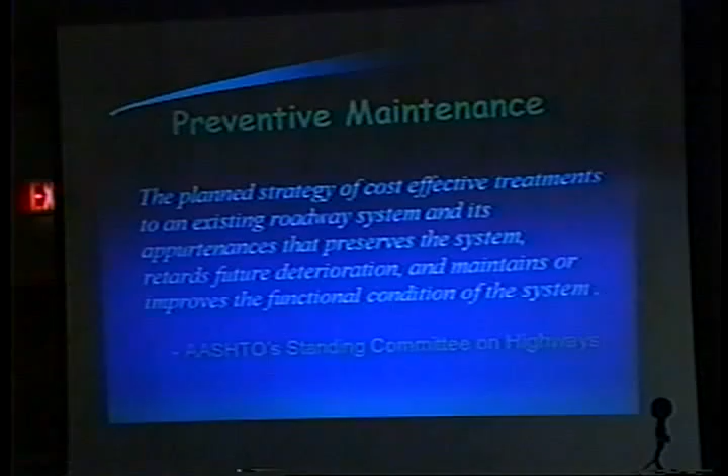Preventive maintenance is a big part of that, and I'm sure either Eric gave you the definitions of preventive maintenance, or we will give you some that have been approved through the National Task Force. The AASHTO Standing Committee on Highways, which works nationwide, defines preventive maintenance as the planned strategy of cost-effective treatments to an existing roadway system and its appurtenances that preserves the system, retards future deterioration, and maintains or improves the functional condition of the system.

The essence of that is, you guys were asking Eric questions about heavy loads and load-related distress. Preventive type treatments are not going to do anything to address that kind of problem. If you have heavy overloads, you have fatigue in your pavements, you need to do something other than these preventive treatments—you're either going to have to reconstruct them or rehabilitate them. We can't go into all the information here, but there's plenty we've got for you on the back table, and we'd be glad to share that with you at any time.

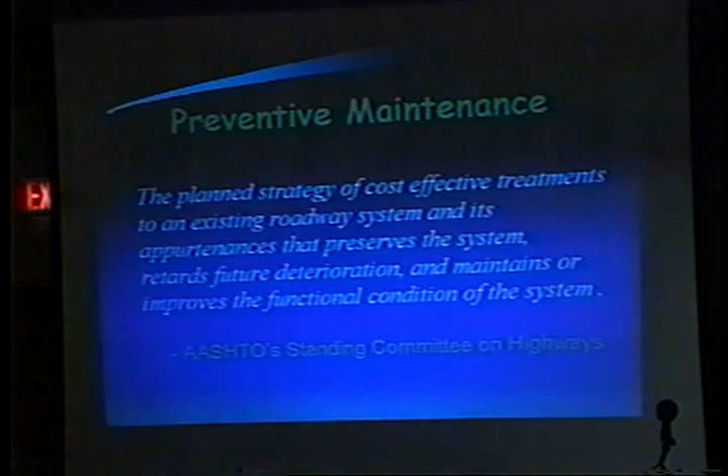Let's take just a quick look at the legislation to get us to where we are today. The Federal Aid Highway Program's been around a long time. Once upon a time, the whole purpose of the Bureau of Public Roads, the predecessor agency for federal highways, was to get the farmer out of the mud. Since then, legislation is reenacted every 4 to 6 years, depending on how long each highway bill lasts. But in reality, what we were trying to do, as one of the previous slides showed, was that our goal was to construct the system.

We wanted to get the system constructed, and philosophically, once we did that at the national level, the program would be turned over to the state and local agencies. Well, in the middle 70s or so, we started to realize we're not going to make it. We'd got the system about 50% complete, and we're starting to get fatigue-related distress deterioration. It's handling a lot more traffic. So at that point, the law was changed, and it allowed resurfacing, restoration, and reconstruction.

As time's gone on, we've changed the program to try to meet the needs, and that brings us up to where we are in the last 10 years. The first one I'd like to talk about is the 1991 Intermodal Surface Transportation Efficiency Act, or ISTEA.

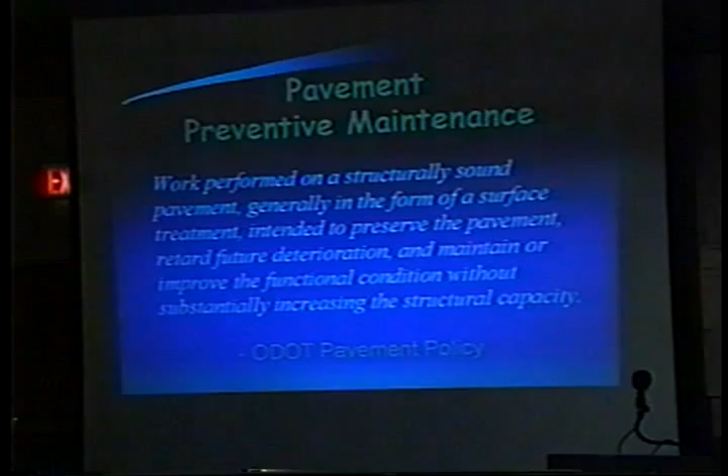Anybody ever heard anything like that? Does anyone know where that definition came from? Where's Eric? Is he in here? You knew where it came from, didn't you? You wrote that. Eric wrote that, okay? So that's in the ODOT pavement policy. Goes to show you not all of us could remember everything we ever did, and it's pretty tough.

Now, some of these definitions are pretty long and drawn out. So what are we trying to get at? Let's try to make this as simple as we can. The philosophy of pavement preventive maintenance: applying the right treatment to the right pavement at the right time. Now, that's the other extreme. That's really simple. We went from pretty complicated, trying to figure out the definition, to the philosophy here.

How do we do that? Well, that's going to take some study and some information. And we have the mechanisms now to collect that information, to store it in our computers, to process it, to use it. As time goes on, we want to build on it. But certainly there are some questions that are a little bit more difficult, and this is about where we are now.

We know the answers to some of these. A lot of these, we need all of you guys from your end to tell us back how some of these treatments are performing on your roads. If we don't all work together on this, we can't answer all these questions. None of us know the answer to all these things.

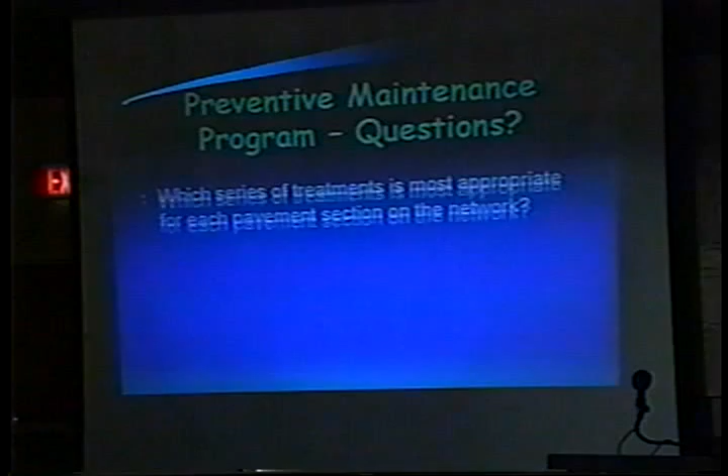Okay, first question: which series of treatments is most appropriate for each pavement section on the network? Does anybody feel like they have the answer for that? Let's take Interstate 70. We built it back in 1959, let's say, one section. It was a concrete pavement. What would have been the best way to get to where we are today?

So 59 to now, that's what, 42 years or so. How could we most cost effectively have used our funds between 1959, when we first built it, and today? Those are the kind of questions that we're after here. That's kind of a tough one there.

When is the optimal time to apply those treatments? Does anybody have any procedures or process to determine when you're going to fix your roads? Obviously, everybody has that. You're out there doing it. What do you base it on? Budget. Absolutely. Budget is driving a lot of the decision-making process.

What happens when you have a year with zero budget, let's say? What do you have to do? You got to defer it all, right? You don't have any budget, so we got to defer it. So the budget's critical. Now, we all have some budget. The question is, how are we going to use that to our best ability?

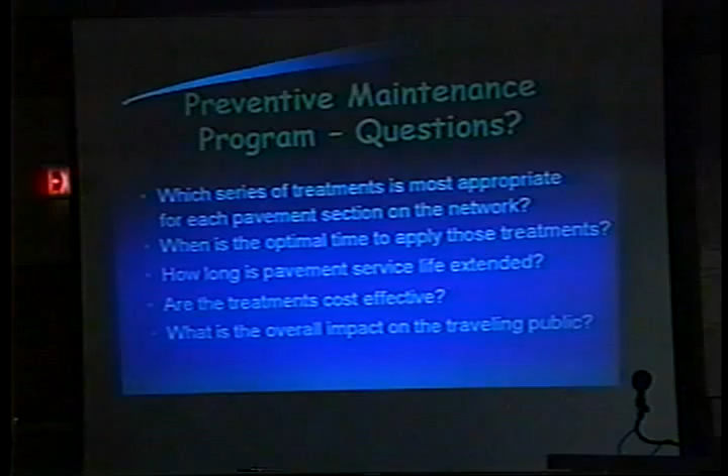What's the overall impact on the traveling public? Boy, we hear this one a lot. Every time I tell anybody that I've just met that I'm a highway engineer and I work in pavements, you know what their response is? Well, you're the guy that's putting all the orange barrels out there. So for this one, this is a biggie. What's the overall impact? Now, some of the benefits of preventive maintenance, we can address some of those things. And we'll get to that in just a minute.

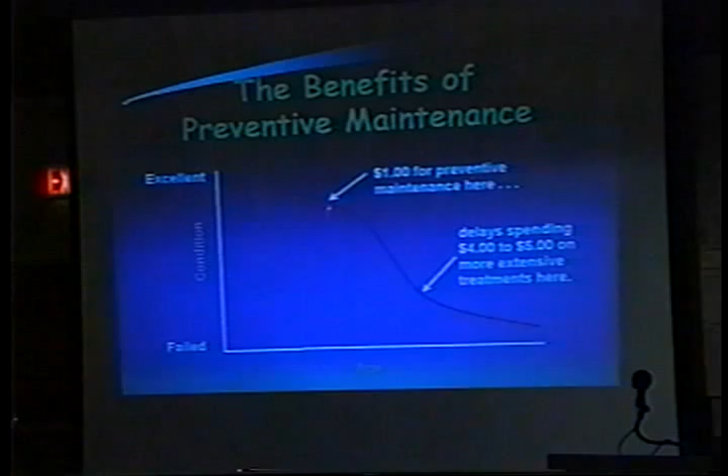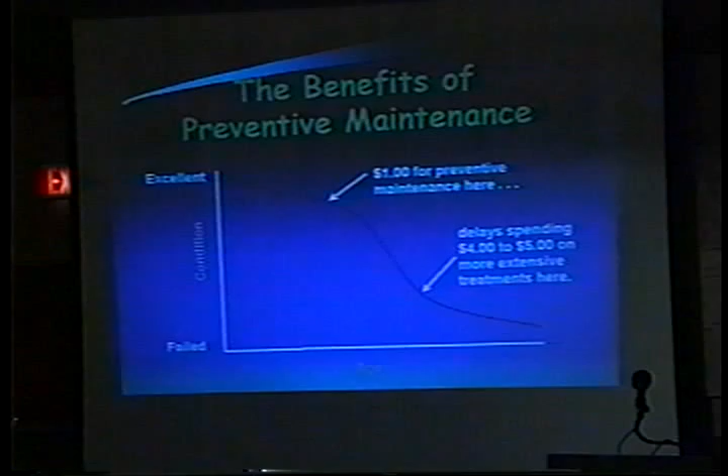So what's the solution to that? Well, what we've learned from our research and experience over the years is that if we come in here at some particular point in time and spend $1, that'll save us 4 or 5 dollars down here. Now look how much time basically has gone by. Maybe that's 70% of the life of the pavement. It's still in real good condition up here. So why are we just waiting this little bit of time to come down here, wait till it failed, where we got to reconstruct it? Let's see what we can do to get up in here and spend the $1 and save the $4 or $5 later. So that's what we're trying to do. That's one of the benefits.

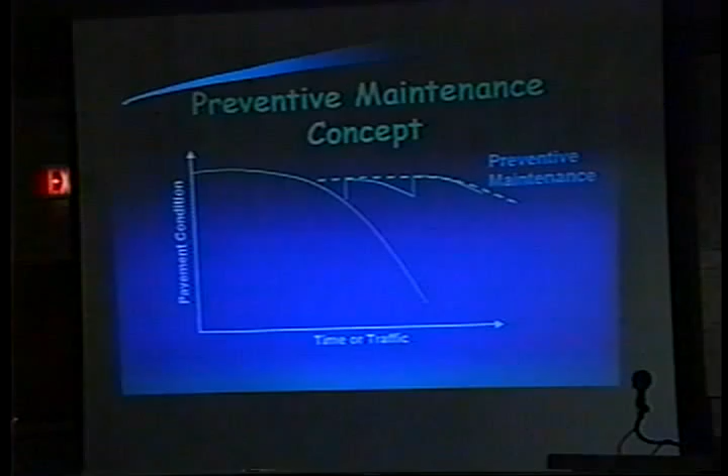Okay, so the importance of preventive maintenance is, first, our focus is no longer on new construction, but on preserving the existing system. Second, preventive maintenance plays an essential role in this preservation. Can we just do preventive maintenance? Well, heck no. Some of our pavements need to be reconstructed right now, or they need structural overlays. They're all in different condition.

We have concrete pavements. We have asphalt pavements. You might have oil-treated roads. You might have some dirt roads now, or just gravel roads, whatever your situation is. You've got concrete pavements that have been overlaid with asphalt, pavements that have been overlaid with asphalt or concrete, and on and on and on. So we have to figure out what's the best way to do all this. But the bottom line is, number 3, we can't afford to keep doing things the same way that we have in the past. We really need to make some changes to make better use of our limited budgets.

Okay, so now when's the best time to do these treatments? You guys have any idea? We just kind of talked about that point on the curve. Somewhere out here, where's this magic point? What is it in your agencies? Like if you're doing a chip seal, how do you determine when you do a chip seal? What condition is the pavement in?

Anybody have any? Were you just scratching or stretching?

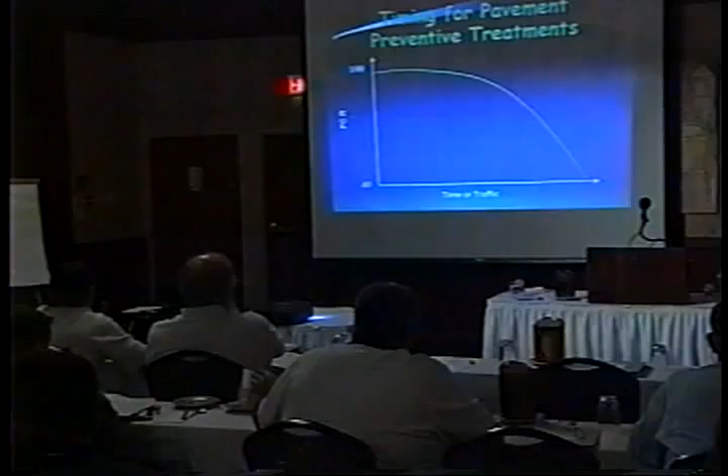Well, we usually go out and every mile of the roads, and patch, crack seal, and patch potholes and major cracks. I work with Dean here, we work together, and if we make the determination that there's so many cracks, and it's getting to the point where we're not moving through very fast, and I know that's not real scientific, but it works. If it's to the point where you've just got crack after crack after crack, it's obviously time you've got a surface treat, well, we call it the chip seal. And that's probably our most used method of preventive maintenance.

And you said a lot of good things there. I hope everybody heard that. Which agency are you with? We're with Bloom and Perry Township in Wood County. Okay. Anybody else with any of the townships or counties?

Well, it really doesn't matter, because no matter who you are or what you're doing or who your agency is, it's going to be different for all of you. You all have different budgets. You all have different roads. They were built with different materials at different times on different soils. So we all have to do what's best. If that experience is showing you that's the best way to go, that's the best way to go. That's what you know, and that's your program right now.

If the road has too many potholes and too many cracks in it, why go out there and crack seal it? We've got to do something more major, like a rehabilitation. Come in and fill the potholes and do a structural overlay, let's say. But we have to figure out what the cause of the problem is.

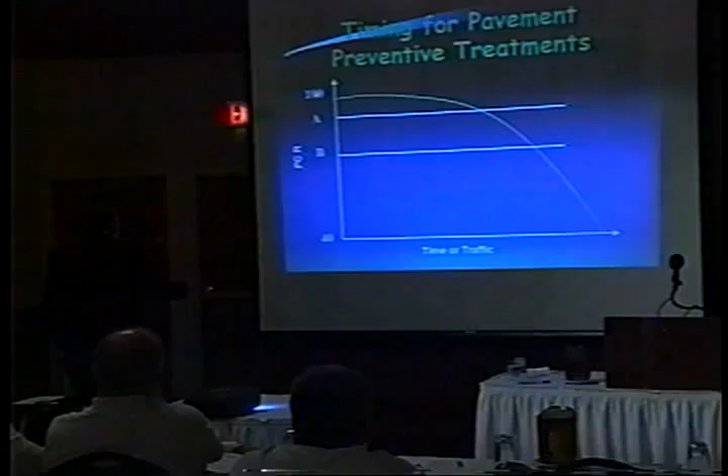Okay, so let's try to take our philosophy here now and say, well, we don't know where the heck the perfect time is to do these pavements. They're all different. So why don't we say that point that we saw before, A, we know it's somewhere out here. We don't know exactly where. So let's just say it's between A and B. And maybe you call this 100 up here excellent and this poor or failed or whatever. You all have different measures for what you're doing.

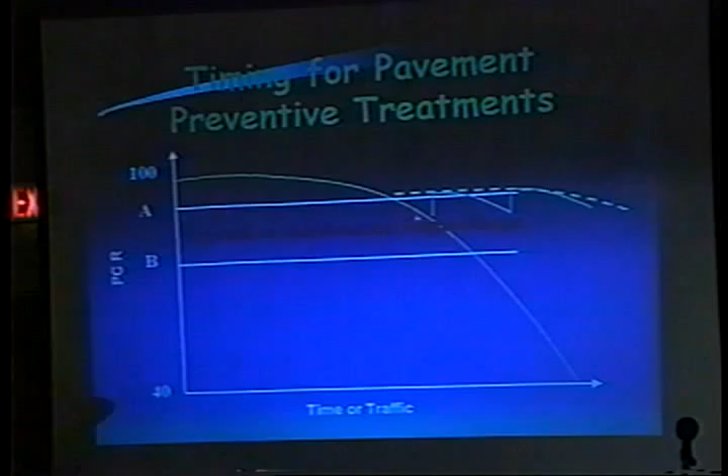So we established a target range to come in and try to start doing these preventive maintenance treatments to keep our condition up at a higher level of serviceability. And like we saw before, that changes this yellow curve to a combination of the yellow and the dashed white out here. We don't know exactly where it is, but if I was driving on a road, I'd sure rather drive on that than have to deal with this. It'd be nice if we could stay up here and keep our roads in good condition. So that's what we're trying to do. Okay, so those are the preventive maintenance treatments.

Again, what we did with ODOT, we worked together on something. ODOT has a very formalized process. They go out, do a distress survey on their pavements every year, and they've been doing this since 1985. So they have 16, maybe 17 years of data. About once a year, they know what condition each one of those sections of pavements was in. Of course, they've got 19,000 miles of pavements to maintain, so how do you keep track of all this stuff? Well, somehow we've got to break them down and analyze each individual pavement.

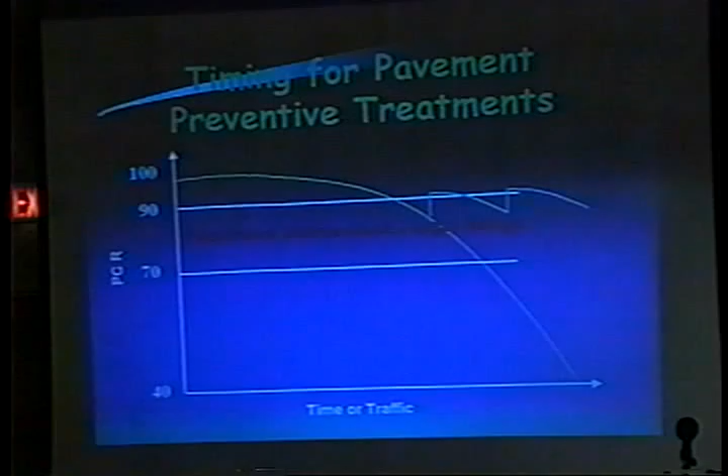So where ODOT says a 40 PCR approximately, that's poor, failed, whatever you want to call it. Somewhere near 100 up there is when we originally built it. Well, we said, we don't know what this preventive range is. It's different for every pavement. So why don't we just say somewhere between 70 and 90? Instead of waiting until it got to 40 and spending the big bucks, let's see if we can do something up in here. We're trying to hit those treatments in this target range, and put the preventive treatments in there. All right, what's the key here to do all this?

Most people are not going to have 16, 17 years of data and the analysis capability that state highway agencies have. And in the state highway agencies around the country, there's 50 of them. They all have a different process and procedure. They're all at a different point. And it really doesn't matter. It's going to be what works for you. How much manpower do you have, if you have any left at all anymore? Are you going to contract these things out, or how are you going to address this thing?

Well, let's again step back and try to make this really simple. What do we need to do? At the state level, California did a study, after they had data like ODOT did, and they said, our goal is to reduce pavements in need of rehabilitation from 29% to 11% in 10 years. Okay? So they're trying to get all those problem pavements that need rehabilitation and reduce that number to 11%. They can't get rid of all of them. You never can, really. It's a very difficult thing to do unless you've got an unlimited budget and you just go out and rebuild it every couple years. Certainly nobody can do that.

Wisconsin said, well, what we want to do is provide the highest quality service possible per unit of service with the budget that we've got. Well, that's kind of like mom and apple pie. We'd all like to do that. That's pretty simple and effective. Then we have the guys up north there. And what they said was, let's keep good roads good. Try to keep them in good condition. This is what we're going to try to do. They started a big program for preventive maintenance in 1991.

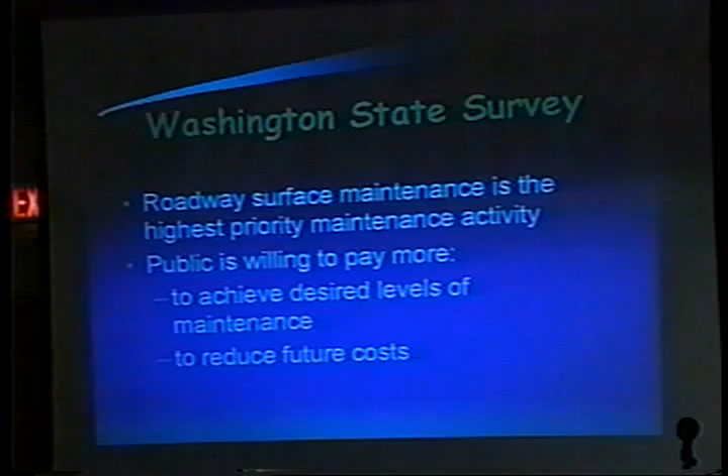How about in Ohio? When ODOT did a survey and they said, all right, people of Ohio, what's the most important thing to you when you go out and drive on our roads? What do you want us to do for you? What do you think? Sorry? Snow and ice removal. Snow and ice removal. That's a good one. That's important. That's a biggie. Anybody else? How about litter pickup? Pothole patching, bridges, signs, guardrails. What rates up there? Pavements. How about safety, overall safety?

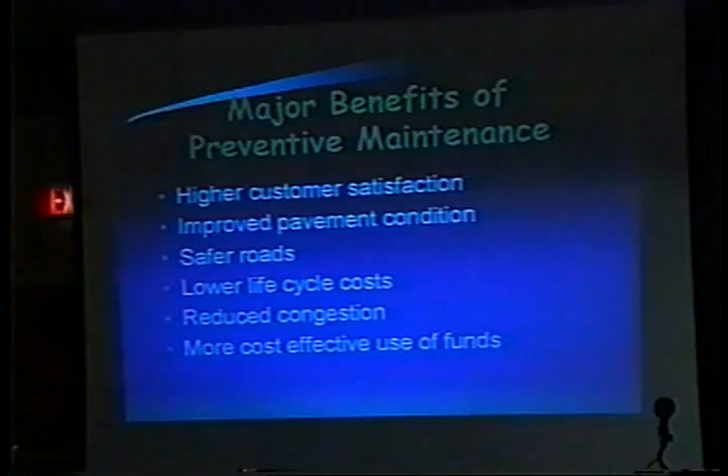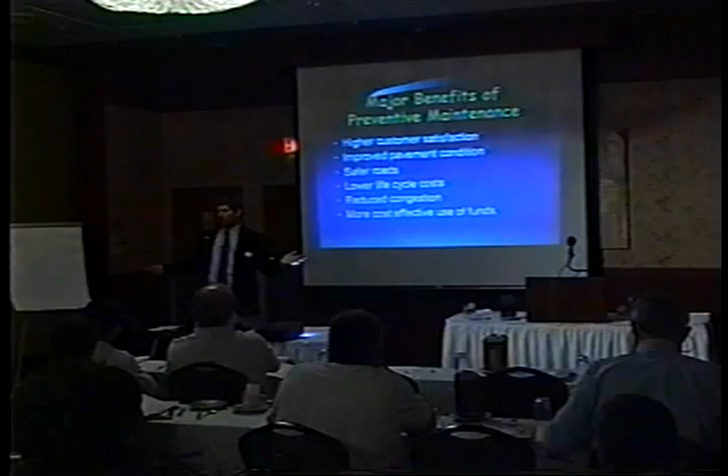The stuff that the contractors just love: night work. We say, all right, Mr. Contractor, you're not coming out here all day and working whenever you want. You can only use this section of the facility from 10 p.m. to 5 a.m. And then you got to get out because we got traffic that we're trying to get through there. And remember, the public doesn't want to be delayed. From 10 p.m. to 5 a.m., it's okay because we don't have hardly any traffic out there. They can get by using that one lane while the contractor takes the other part to work on.

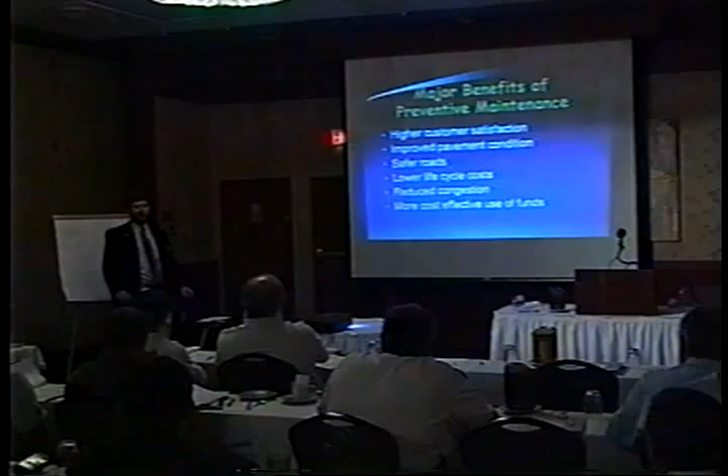All right, and the bottom line again, more cost-effective use of the funds. That's what we're trying to get to. Higher level of service, less expenditure.

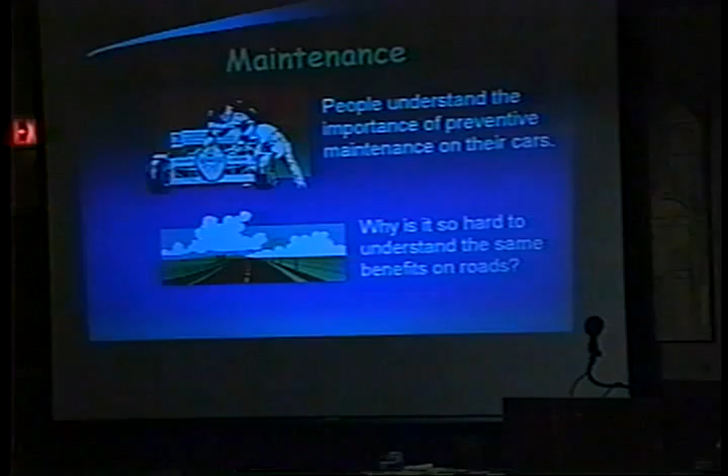This one's kind of self-explanatory. We all maintain our cars and our homes. Why not the roads? What are the keys?

Obtain top management support. If the boss doesn't buy in, if you guys go back and say, well, that sounds good, but we're not going to do it, what's going to happen? You're not going to do it. So we got to get the decision makers to understand.

Identify a champion. Maybe you guys will be the champion of your program when you go back, but somebody has to push this stuff or it never gets done. Develop guidelines. Eric gave you a copy of the guidelines that ODOT wrote.

Monitor condition over time. You may or may not be able to do that. Document the benefits to say, hey, we think we're doing better. We think we're using the money better. And refine our treatments after we gain experience.

Maybe we were chip sealing every 5 years, and we're learning that, well, this pavement we can chip seal every 7 years because it'll still be in good service. But this one over here, we have to chip seal it every 3 years. So it depends on the pavement in that individual section.

Okay, in summary, got to get away from worst first. Preventive maintenance can extend pavement life and reduce costs.

What are the keys to success? We think you got to have some kind of goal. You got to say, we want to keep our network at this level of service. Because if you're way down there, the public's going to complain. If you're way up there, it's going to cost you way too much money. So at what level do you want to maintain your network?

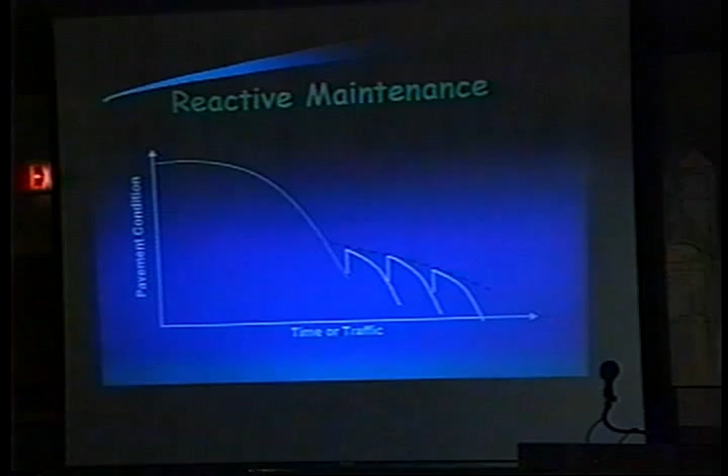I'm getting a signal that I'm way too long-winded. I was going to take some questions, but we'll have a panel tomorrow afternoon, so if you have any questions I'll be back for the panel and glad to address them then. Thank you very much.

Thank you, Bob. I just have to comment that the budget problem is not new. Fifty years ago, when I was in college, my civil engineering department head said every decision you make when you get out in the real world will be based on economics. I was 20 years old and didn't have any idea what he was talking about, but I sure do today, and it has to do with our personal life and your job life. So you were right on target with that.

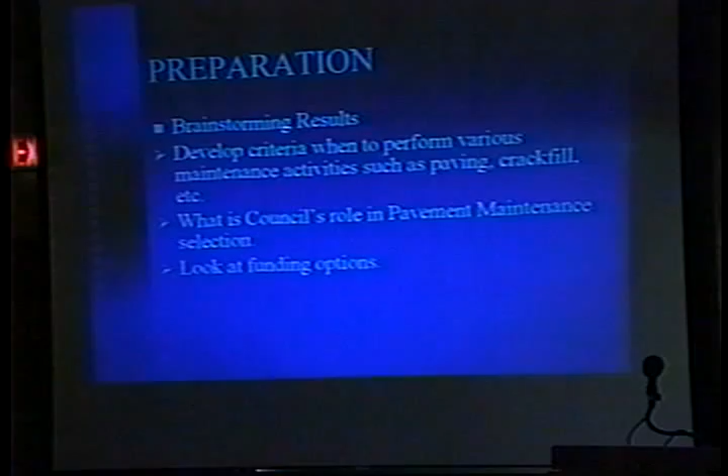Got to look at the funding options. We're taking a real close look at eliminating the assessments because of the headaches that causes us. We're looking at the possibility of a millage on property taxes so that everybody pays a little bit, dedicated towards pavement restoration. If we do some type of new funding source like that, the group realizes we have to legislatively tie that money to pavement maintenance, or some community center somewhere that one of the politicians wants, that they don't have quite enough money for, well, let's take it out of the pavement maintenance. So we've got to lock that money up. We're working on that.

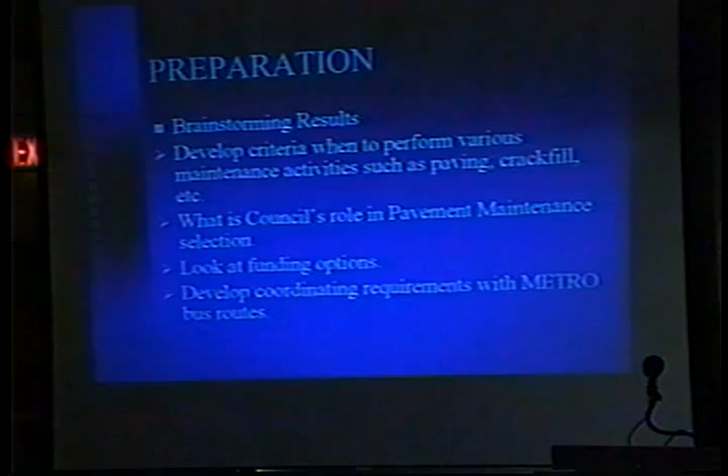We have Metro, which is our bus company. We've recently had some routes that Metro switched onto some of our residential streets, and within 3 months those streets saw 15 inches of rutting. I physically couldn't drive my city car across it, because it was never designed for those types of loads. So we have to coordinate with them better. This all comes down to: it became very evident very early on in the process that we needed a computerized pavement management system, and if we didn't have it, we were not going to be successful in anything that we were doing.

We looked at a lot of different ones. We decided on MicroPaver. I mean, there's a lot of programs out there. I used to write the software, so I helped develop new stuff. If you've got somebody that's knocking at your door saying, I've got the newest program for you, and it does everything, man, turn around and run. Kick him out of your office as quickly as you can.

I've seen too many programs go in that were brand new on the market, no one's ever used before, but this is the greatest thing since sliced bread. If it ain't easy, it ain't going to work. And if you're not dedicated to it, whatever that system is, it's not going to work either.

Funding. We had our task force chairman go to city council, and we had a request in for $260,000 for a consultant. We actually bought this program probably a year ago. The program's only $800 bucks. I mean, that's the easy thing. The hard thing's getting the data to go in it. And so we thought, we'll buy the program, $800 bucks, and then we'll fit in the inspection of the streets and the input of the data in our spare time.

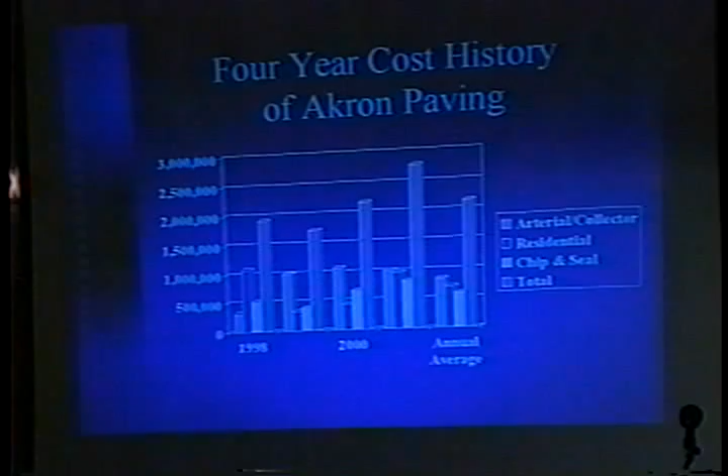So if you're thinking about how much budget the City of Akron's spending out of city tax dollars, cut those all in half. And chip and seal assesses at a higher rate. It's about 75% of the cost of doing the work we charge for. So as you can see, from year to year, about 1.8 million in 98, 1999, 1.7 million roughly, 2000, 2.2 million.

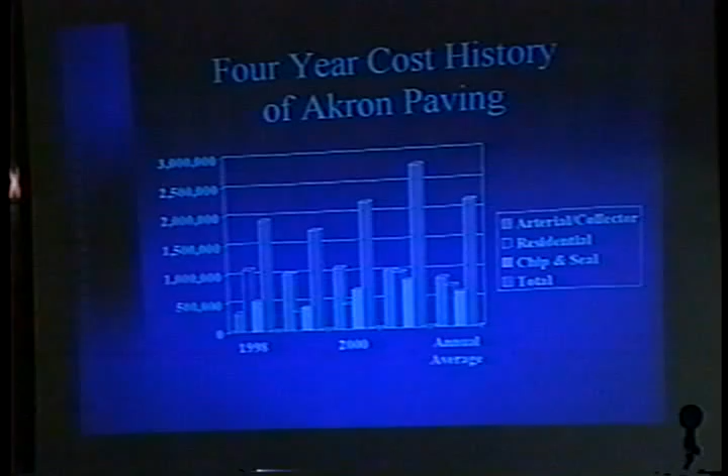2001, this year, they knew that we're working on this report. They knew this task force is coming. So they knew that we're going to be coming in and saying, we need $4, $5, $6 million a year to try to catch up for the next 5 to 6 years, and then we can drop down a little bit from there to maintain, because we're going to be in this catch-up period. So because of that, they found an extra $1 million to put into the program. So that gives you an idea of what Akron has done over the last 4 years.

If we're in a low budget year, historically what we've done when we've sat down and said, okay, what are we going to do this year? Well, we don't have much money. Let's do a lot more chip and seal. We can still get our mileage. Our assessment rate's so high that we get the most bang for our buck.

So the way that we're picking the streets that we're going to do is how much money we have to dedicate to each program. They give us a lump sum of money and we can spend it any way we want to within the arterial collector, the residential, and the chip and seal. Which, that is the wrong way to pick your pavement that you're going to fix.

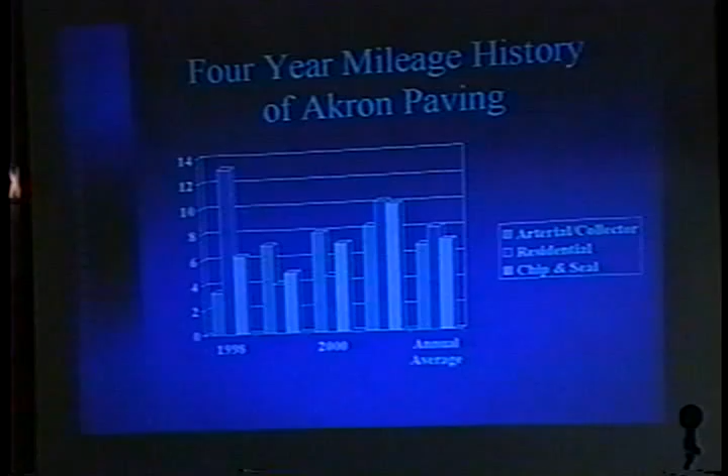Now, this is a startling one to me. What I did on this is I said, okay, let's figure out what percentage of our arterial collectors we paved in 1998. So in 1998, we paved about 1.4% of our arterial collectors. If you look at the annual averages, over the last 4 years on arterial collectors, we've averaged 2.8% of our arterial collectors paved each year. 2.3% roughly on residential, and 3.8% on chip and seal. And that's because chip and seal assesses higher.

Now, some of these are skewed a little bit, but arterial collectors, Akron, we have 230 miles of arterial collectors. With the percentages we showed on the last slide, that means that we'll pave once every 34 years on an arterial collector. How many people's pavements last 34 years? Now, granted, these numbers are skewed because this doesn't take into consideration monies that we get with ISTEA funds, issue 2. I would have liked to have rolled everything in and given you a better presentation, so these are a little bit high. But they're not that far off.

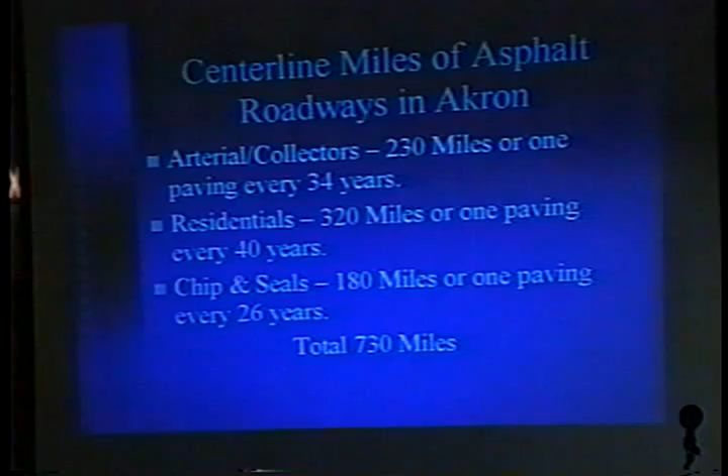Now these are strictly asphalt roadways. So we have about 730 miles of asphalt roadways. We have another 160, 170. We don't really know how many miles of roadway we have. We think we're in the ballpark. The consultant, after doing their inspection and putting this all on a computer, will be able to tell us exactly how much we have. So right now we're just kind of guessing. But the remainder of the streets, the roughly 150, 160 additional miles, are concrete and brick. We still have a lot of brick streets in Akron that have their own unique problems.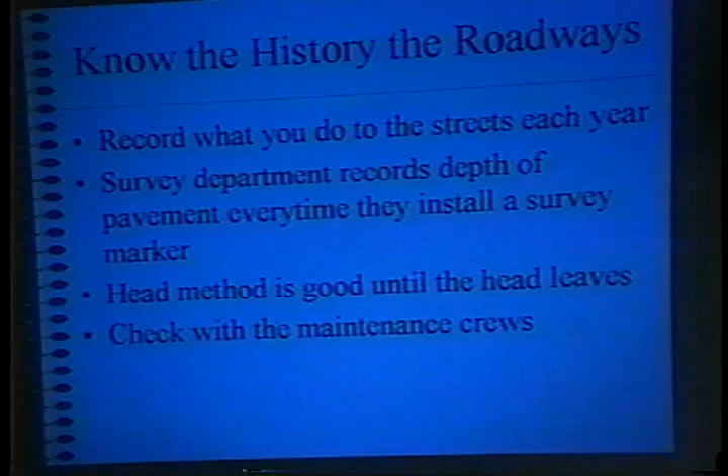Doug, he was a predecessor to Doug, and it's a very, very tough job. But Rel retired. Well, unfortunately, he took his head with him. So if you have that method, try to get it out of the head before the head leaves. Get it on something, get it on a computer, get it on a pad of paper, do anything but get it down. Check with maintenance crews, that's always a good source too.

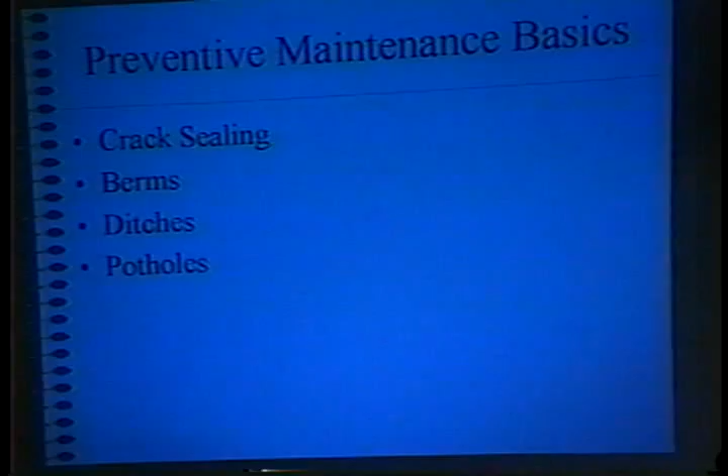I just want to go through the real basics. You guys went through some of the higher stuff. I just want to go through some real basic stuff that we do and how we do it and what the results are. Crack sealing, heard everyone talk about it. My guys, when I first got there, loved pouring the AC in the crack, spreading some sand on it. Who does that? You guys still do that, right? My guys love doing that. I stopped them from doing it 7 years ago. I'll show you why in a few minutes.

We have AC with rubber. I think it's okay. We haven't had real good results with it. Tom Nutini is with me. Tom is my highway maintenance engineer, but he's also in the same capacity with the city. Quick story with that is we have a contractor who was doing minor widening work, and he had a pavement joint, and we always told him to seal up the joint. And he'd use the AC and sand, but the joint comes back just like that.

The AC disappears. So we got blocks of AC and rubber, and you put it in the kettle, melt it. He told me to go out and look at it, said it looked pretty good. So I went out and looked at it. When I went out and looked at it, it was laying in the ditch. He said, oh, I forgot to clean the pavement and blow it out. I'm going to do another one. And he did another one. He said, come out and look at this one. Tom told him, why don't you just peel it up and bring it in the office. We'll look at it in here.

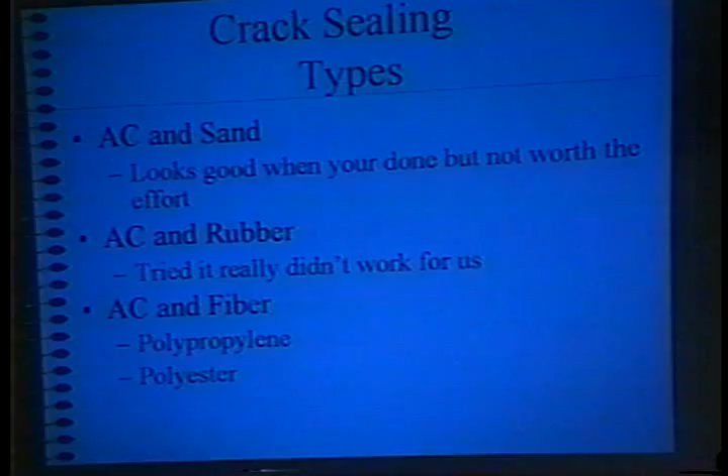In terms of crack sealing, I'll go through the real quick things. Tom, you can jump in if you want. When we did start off in crack sealing, we did it in a pretty big way. Like I said, you do it as soon as it's needed. Someone says, what's DA? That's duh. We started on several programs. I was with the city when we initiated some of these, and I remember the first ones we decided to start doing entire subdivisions. Rather than just doing streets, we decided to do whole areas.

One of the mistakes we made was we started on subdivisions that were pretty old. As a result, we put down a lot of crack sealing. Right, Tom? A lot of crack sealing. Also, we put them on streets. We didn't pay attention. They didn't have curb and gutter, and there were no sidewalks on some of these streets. People used the streets for where they walked. Man, did we get complaints. We crack sealed it. Must have been the hottest summer in the entire history of Ohio. It was in the 90s for days, and people were complaining about it tracking all over the place. We also crack sealed the gutter.

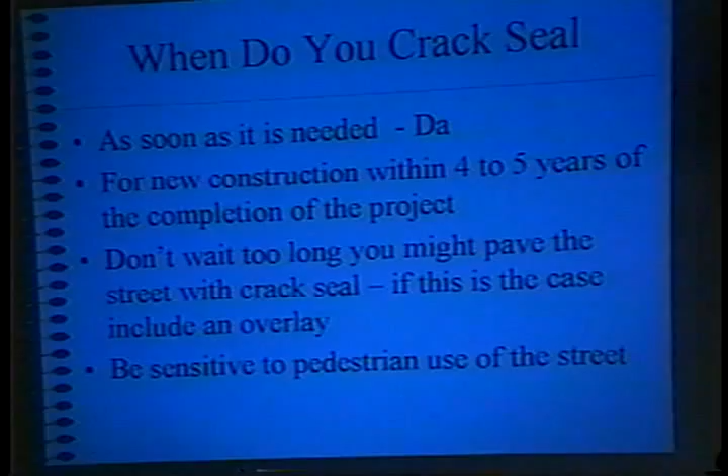Yeah, don't seal the edge of the gutters. We found that out. At least it didn't work for us. Especially if you don't have parking on the street, you're okay, but the cars parked on it and it pulled it right up. Make sure the cracks are blown out. Need some quality control check on the amount of fiber, just to keep everybody in line. Just don't assume what they're putting in is what you're supposed to be putting in. So check it. Doesn't cost that much to check it.

I might get a little controversy here, but I do like square yards. A lot of people, we used to pay crack sealing by the foot or by the pound. Square yards, you're saying, how in the hell can you pay by square yards? We pay by square yard of the pavement. So we figure up the total square yard of pavement. That's our unit of measure of pavement. Contractor has to go out and look at the streets. He has to estimate how much crack sealing goes down.

Versus you having to estimate how many pounds you're going to put down, how many feet you're going to put down. Every one I've estimated way low. So we go on to square yards. One of the nice things about square yards, well, it's easier to calculate. Two, I think they end up putting it down thinner because the less they put down, they get the same unit price. It's not going to change on them. Put it down per pound, the more they put down, the more they get paid.

So, and like I said, you can do your own crack sealing on a very limited basis. I would not encourage doing it on a large scale, but we got a small kettle for doing those small spot repairs or joints here and there where for the contractor it's not worth their effort. It's not going to come out. Do a small widening or whatever, but it's worked out pretty well.

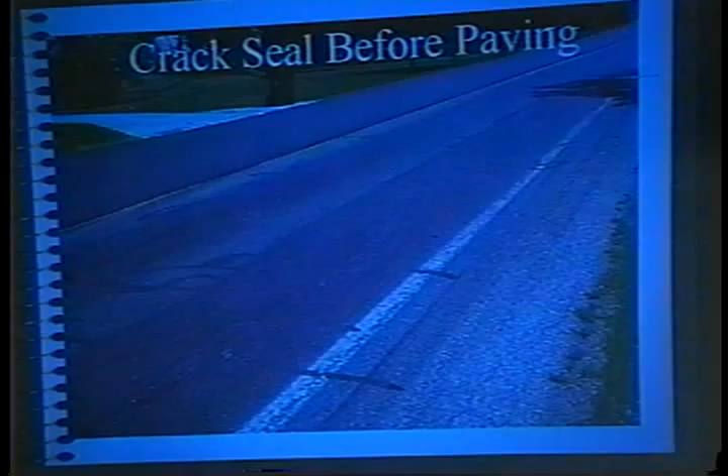Typically before an overlay, crack sealing we've done. If you have a street that has a lot of cracks, I just hold off, try to get it scheduled for some kind of either pavement or slurry seal or microsurfacing or something, because you get that much down, if it's on an area where they got to walk, you're going to hear about it. Typically, we go down to pretty small cracks. I think the standard was 1/4 of an inch, right, Bruce? We went down to 1/8 of an inch.

Berms. We're pretty religious on berms. When I was with the city, we weren't so religious. Going to the county, it's a whole different ball game. One of the things we do with berms is keep water away and give support for the side of the road.

We're real big into trying to get them graded out. We have a program every year. Crews go out and do berm work, chip sealing. If they're high, we grade them out. One of the biggest things that causes damage to our berms is our plows. But we're very, very big on the berm in terms of preventive maintenance.

Like I said, we have a good annual program. We chip seal. I recommend chip sealing over paving.

A lot of people will recommend just resurfacing the street. Say, hey, I can just widen out the paver, put an inch of asphalt on that, cover up that berm, save you money, be cheaper than chip sealing it. Yeah, it is cheaper. The problem I don't like about it is you lose the edge of the road. Now you have asphalt out there that's only 1.5 inches, 1.25 inches thick. You'll see it start to crack up after 3 or 4 years.

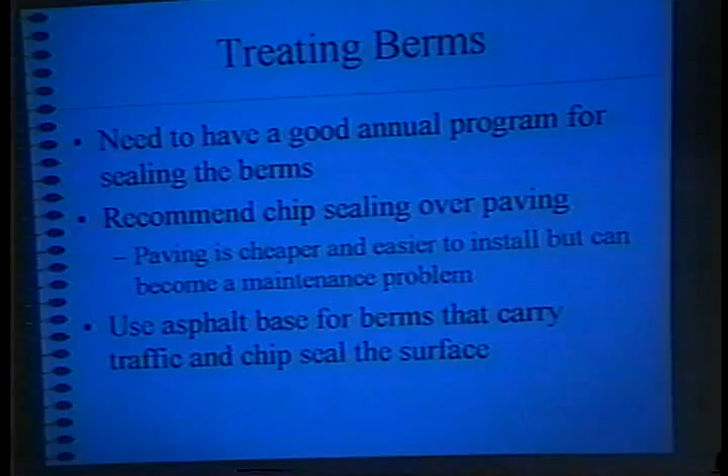We had situations where we put in like 6 or 7 inches of 301 and chip sealed the surface. Looks like a berm. Well, then at least when they drive over it, it lasts a little bit longer.

Basically, our operation is our crews. How many miles do we do a year? You have any idea, Tom? Between 150 and 175 miles of berms we do every year.

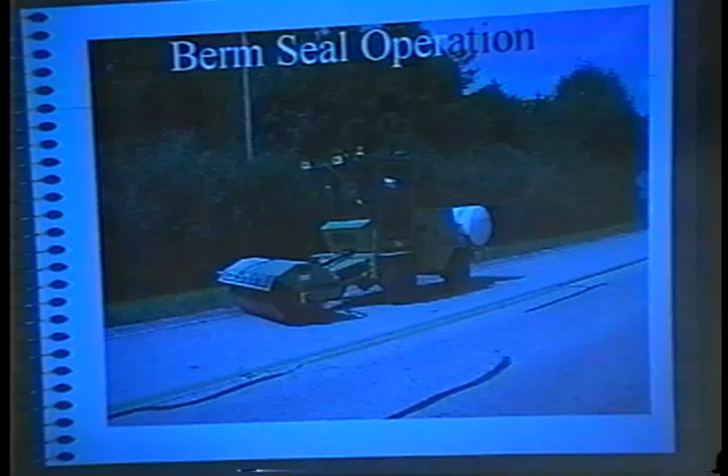Just a distributor, stone box, rubber tire roller, and clean it off. Pretty simple operation. We have 4 headquarters, and we pull guys from each headquarters to create a specialty crew, and that's what they do for about 2 months, 3 months, 2 months.

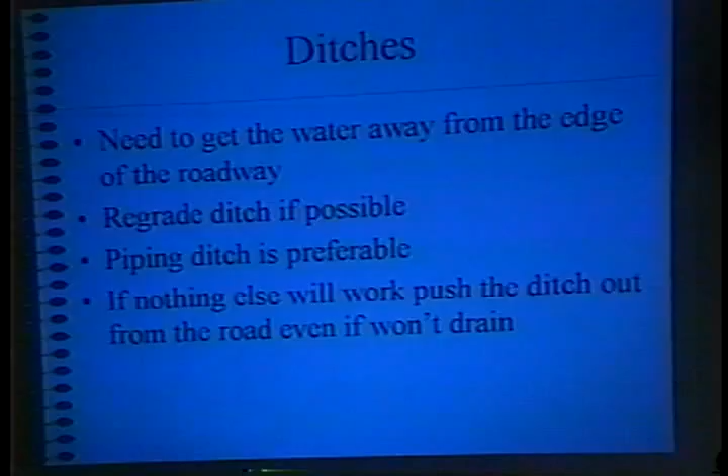Ditches: need to get the water away from the edge of the road. Water causes you more trouble than anything. It makes the side of the road soft, you lose that side support, and the road will start to push out. Regrade the ditch if possible. Piping the ditch is preferable. If nothing else worked, when we've done this, just push the ditch out away from the road. Even if it doesn't drain, if it's going to pond up, I'd rather have it be a little bit further out from the road than right next to it. In terms of enclosing roads and piping ditches, we probably do about 4 or 5 miles a year, basically with our own crews, and that's worked out pretty well.

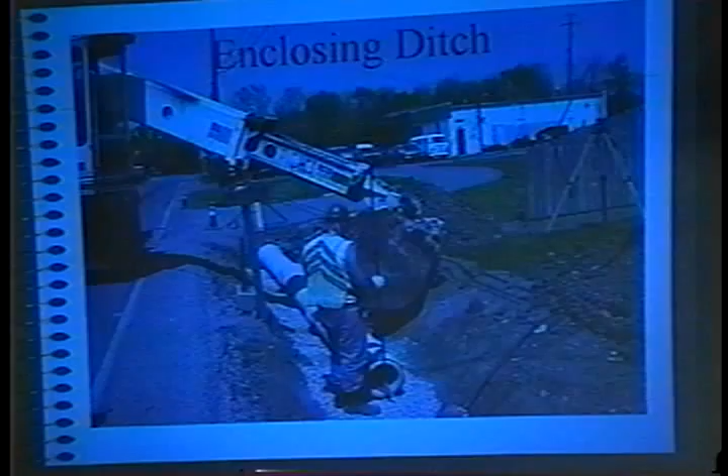We had one road, Bruce was working for the county then. When you hear from Bruce later, we did a design, what was it, $2.5 million to rebuild the road, Bruce? And we did a recycling with the company he's now involved with, kind of. Same problem, we had ditches that didn't drain, it's flat. What we did was push the ditch further out. It still doesn't drain, still flat, but at least it's not up against the edge of the road. It's a simple solution, it works, gets the water away from the edge of the road.

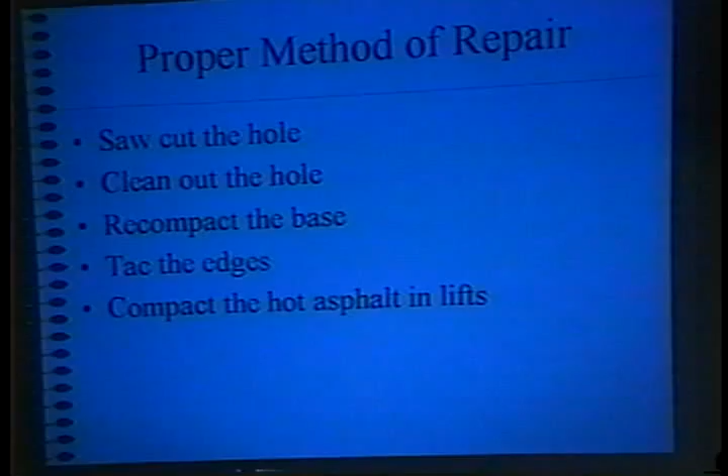Potholes: fix them as soon as possible, even before they become a pothole. Proper method, you've all gone through courses: saw cut it, clean it out, recompact the base, tack the edges, compact the asphalt in lifts. Who does that? I didn't think any of you did. Okay, close? Well, we use the second method, at least chip the loose material out of the hole, tack the edges, compact in lifts.

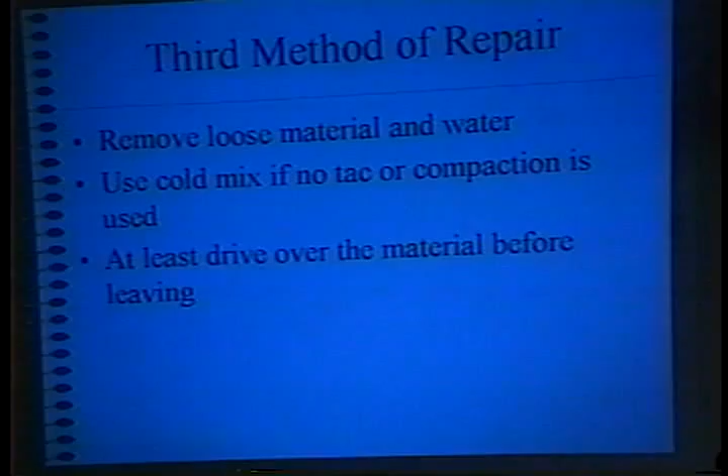Third method: remove the loose material, hopefully the water, use cold mix with no tack, at least drive over the material before you leave the site. We used that a lot at the city of Columbus when I was there, because it's just a matter of number of holes. It's hard to keep up when you're falling way, way, way behind.

Fourth method: spray patch machine, which has become very, very popular. I really, really like this one. We have a small machine. The city of Columbus has 3 fairly large, I think, Roscoe machines. I'll show you those in a little bit.

First method, a lot of people don't do because it takes too long and costs too much. But I'm telling you, if you do the first method, you're going to save time, you're going to save money, and you're going to save your road. Sure, the guys can throw that cold mix in there and back off and be gone in a matter of a few seconds, but trust me, they'll be back, and they'll be back, and they'll be bigger and bigger.

Oh yeah, that's right. We do saw cut them out. I forgot that. We are one of the agencies that do saw cut them out. Right, Tom? That was a real small hole, Doug, you told me about earlier.

Also, look at the road. I'll give you a little background on Franklin County. Our average rating, we use the standard method, 100 scale. Our average rating is 80 on our roadways. Since I've been here 6 or 7 years, when we've done resurfacing, the streets I've looked at, I got a couple of people here who can help me out.

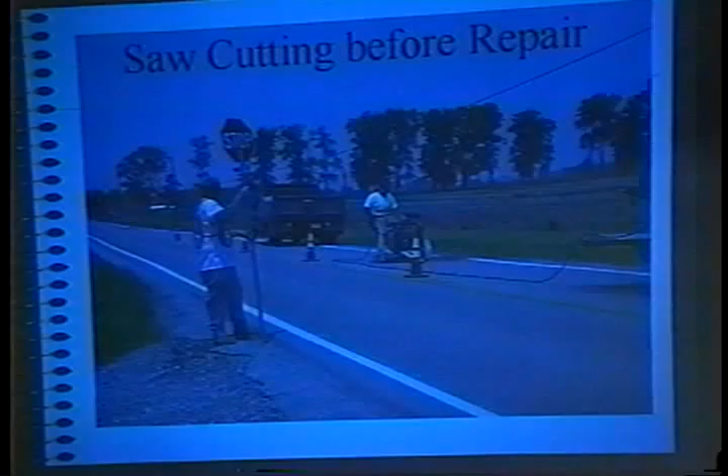Very few times do we have potholes in the roads we overlay. You can see what they're doing here. It wasn't exactly a pothole. The area was starting to see some problems there. See the rest of the road, you can see the shape of it. We went out and saw cut it out, replaced it. You can see up close. Can you see the pothole? No, because there isn't one. But there was going to be one.

Mr. Circle, who used to be the county engineer, said if anyone found a pothole on the county road, he'd go out there and fill it personally. So it was a strong incentive, and we have very, very few. The only place I really got potholes was on bridges, because the bridge deck's falling apart, but we have a program to replace those.

Talking about that reminds me, Joe, I'm glad I got here because you emailed John Circle to let me know about it. You know, John died a year ago. That's the email you gave us. Oh yeah, then he faxed me some information and sent it to an elderly home, right, Joe? Yes, that's the...

City of Columbus has got, well, how many big Roscoe machines they got, Doug, do you know? 4 or 5 of them? Tom, you remember? They have 3 now. 3 now? Those are about $160,000. But it's really, really, if you have a problem with potholes, that's an excellent operation. I remember when we first looked at those machines, our maintenance engineer was looking at them. He invited me out there, and I was asking all kinds of questions about the machines. After I left, the guy asked the maintenance engineer, who was the guy asking all the questions? He said, well, that's the guy who's going to buy it. So, I better go talk to him. So, I think we bought 2 of them that year.

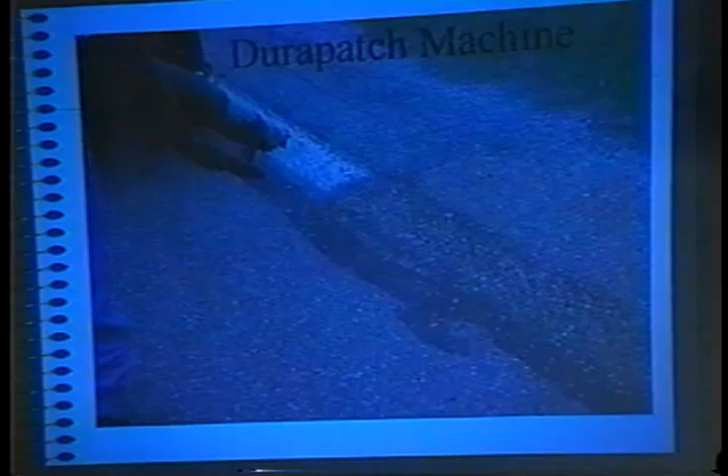Utility cuts. Let's go through this real quick. I don't know how many people have problems with utility companies. Hey, Paul, you're going to have problems with utility companies. Utility cuts versus a pothole, what's the difference? There's no difference between a poor repair utility cut and a pothole. There is none whatsoever. City of Columbus, just to give you a little background real quick, because that's my background in utility cuts.

We rewrote the whole program. In terms of utility cuts, we used to hand out like 3,500 to 4,000 permits a year. We went through a whole program, rewrote the ordinances, worked extensively with the police department. Worked with them so well that Tom was invited to the police academy every year to train cadets on utility work permits. We went from 4,000 permits a year to 8,000 permits a year. The work didn't increase, we started arresting people. Tom went to court on a routine basis, what, once a month? For quite a while? Sometimes busier months than that. We went from 4,000 permits to 8,000 permits just by working with the police and training them on what was going on out there. We had a tremendous problem with utilities. Then we rewrote the whole process of how to backfill that hole and how to fix it.

I think at the end of your program you have Fritz Smith from Decker Construction. Hopefully Fritz will go through that. If you have any problems with that, Paul, if you haven't seen it, contact Doug or get hold of somebody in the city. They have a fabulous program of utility cuts. Because how the utilities look at the roadway, as far as they're concerned, it's just a hard surface access road to their utility.

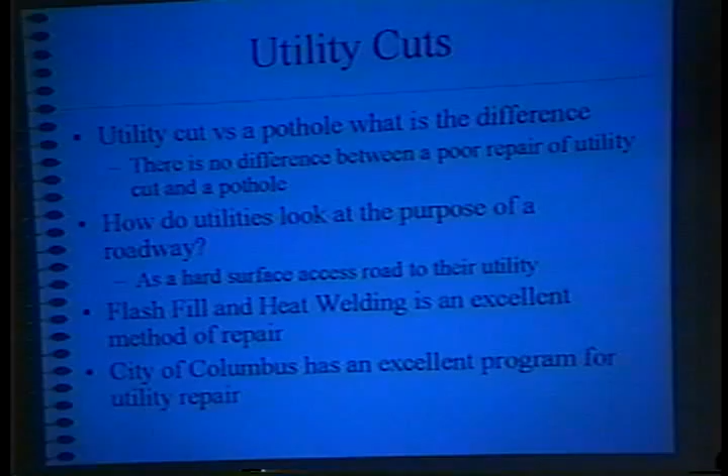Real quick, the reason I get real quick here, because it was 11:30 last night, I was just getting damn tired. That's all there was to it. So I got a few things real quick.

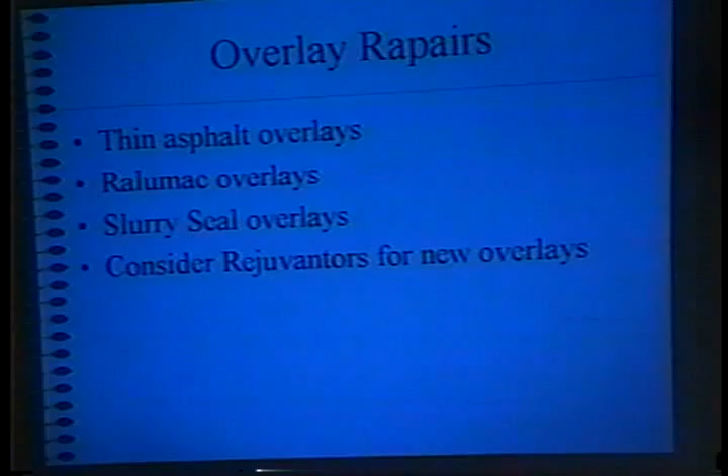Thin asphalt overlays. We do the cutouts in advance, and I want to talk some preventive maintenance. Like I said, our average condition rating is 80 when we overlay the streets. When Tom first went out and looked at the streets with the city of Columbus, I wish I could take Doug out and show him the streets that we pave. He'd laugh so hard, tears would be rolling down his eyes. Because we have a fairly active preventive maintenance program. I think that's why they have that high rating.

Seriously, when I say we don't have any potholes, we have very, very few. I mean, I don't think we have any. But typically on our overlays, when we say 1.25 inches, that's a lie. We scratch every single street, and we do the 1.25 inch overlays. So we're probably 2.5 inches thick on our overlays.

Because sometimes I see these scratch courses. If you do a scratch course right, you go out there and see the crushed stone and everything. I don't see any crushed stone. I think we're putting it down a little bit thicker, but it's paying off for us.

Slurry seal, another product we use based on our township streets. Oh, real quick, for our townships, I don't know about the other townships, but we have our pavement management program. We include all the townships. We provide that free to them. So we rate all their streets too if they want, and we provide that information to them on a yearly basis.

Huh? Can you come up to Akron and do that? I can't beat your consultants' prices.

If you haven't seen the slurry seal, I'm sure Bruce is going to get into that in great detail later. But we use, for the hot mix, Ralumac. I have pictures of Ralumac, but our contractor's so far behind I couldn't get you any pictures of it. Slurry seal. But they all have their purposes. They all have their uses. Ralumac, in terms of skid resistance, is absolutely fabulous.